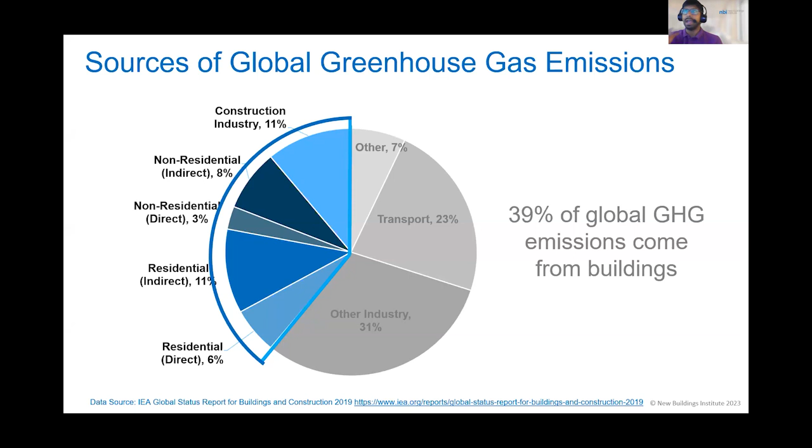All right, I think folks are pretty familiar with the slide that 40% of greenhouse gas emissions globally comes from the built environment, whether it's through electricity or combustion on site. So it provides a huge opportunity and challenge to really get our greenhouse gases reduced. Within the electric sector, we've seen a huge improvement through CFL and LED light bulbs. And now we're really trying to figure out what's next. What's the big things we can do now that LEDs are pretty much ubiquitous.

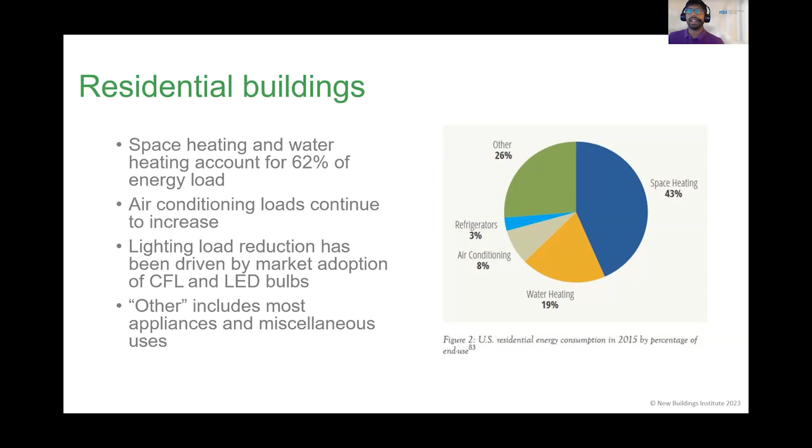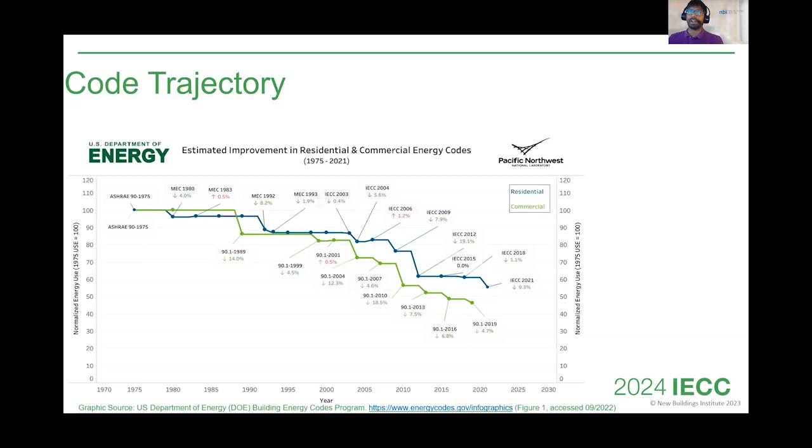For those who aren't familiar, the International Energy Conservation Code is a code released by the International Code Council every 3 years to set out provisions for both commercial and residential housing that's then adopted by states and other jurisdictions. They provided a goal to have a net zero code by 2030, and this 2024 code is the first code since that goal's been set. So we really thought it was an opportunity to crank that efficiency up.

And a lot of you might know this, some of you may not, that the process of developing the code was voting by governmental members since the IECC was created in the 70s till the 2021 code cycle. This latest code cycle was adjusted to be a consensus committee process, therefore allowing, in addition to governmental members, advocates like NBI at the table, as well as industry representatives. So that, I guess, provided some confusion. There's definitely been some learning as we go, but it's been an opportunity to kind of have a seat at the table. All right, so this process has been slow. All right, I'll pause here.

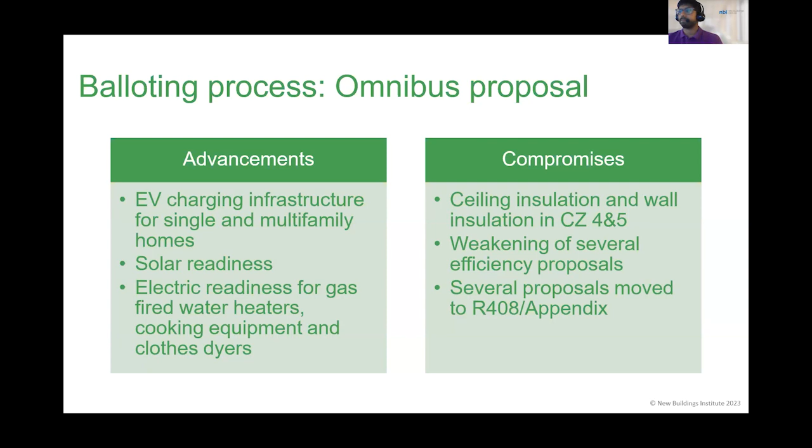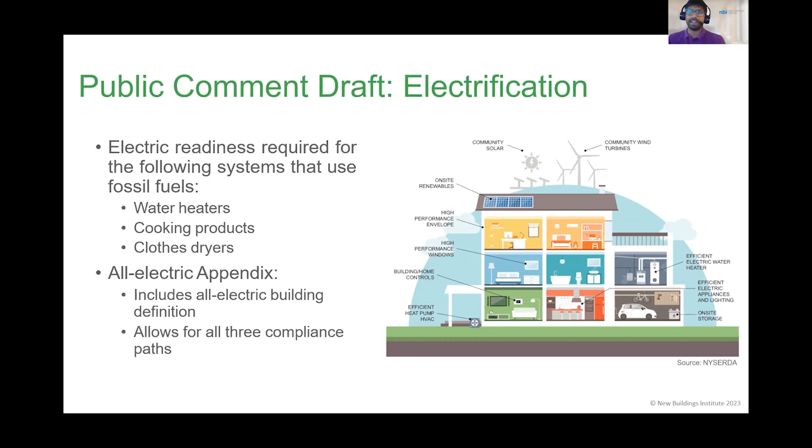All right, so through that omnibus bill, electric readiness was required for water heaters, cooking appliances, as well as clothes dryers, and there's an all-electric appendix that includes an all-electric building definition, as well as 3 different compliance methods. Again, EV charging is something that we're really excited about seeing. It's so much more cost effective to put these in on the front end rather than the back end. So primarily in R-2 occupancies, 40% of dwelling units will be required to have an EV capable, EV ready, or EVSE. And happy to dive into those definitions if folks want to.

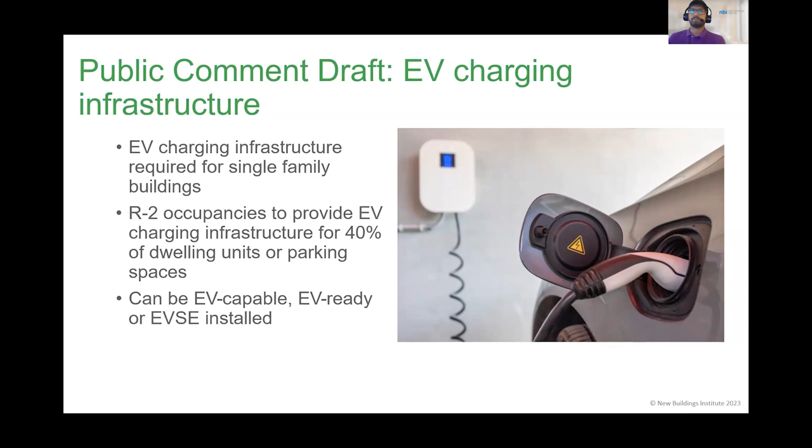Solar readiness. So this basically, with exceptions for poor orientation or smaller homes or shading, will require a very minimal amount of solar readiness, with the idea that the cost-effective way for sizing is to match the cost-effective capacity of the building. So all the technology will be there, and folks will be able to kind of hook that solar up when it's ready to go.

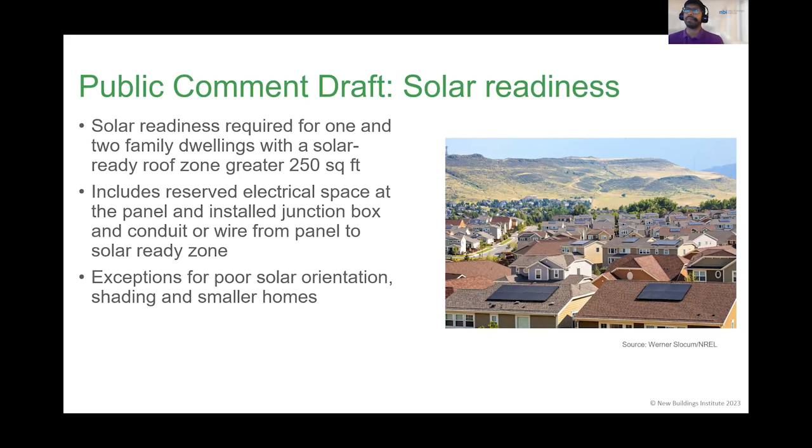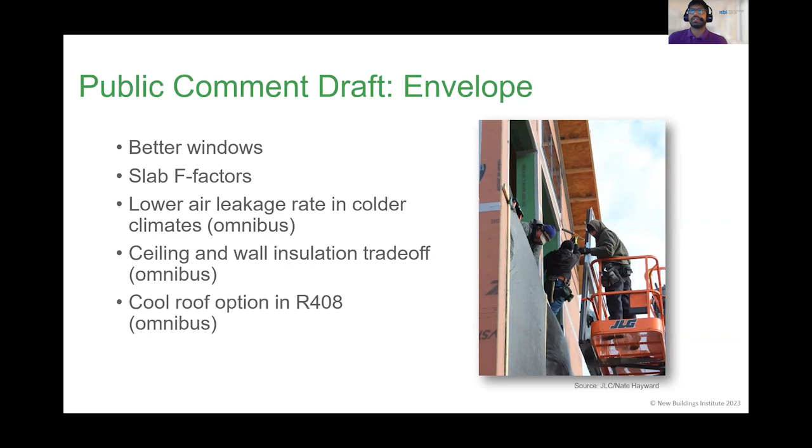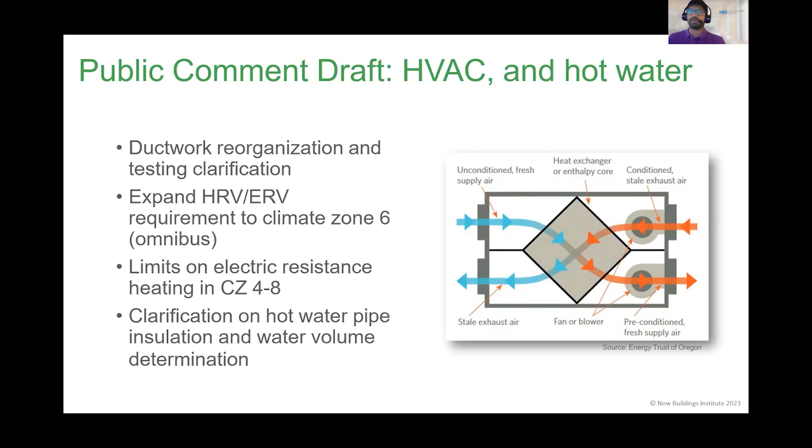Other improvements: better windows, slab insulation F-factors, lower leakage rate in cold climates, ceiling and wall insulation trade-offs, as well as a cool roof option in 408. On the HVAC side, there's expanded requirements for HRVs or ERVs to Zone 6, limiting of electric resistance heat in the colder climates, as well as increased requirement for insulation on water pipes.

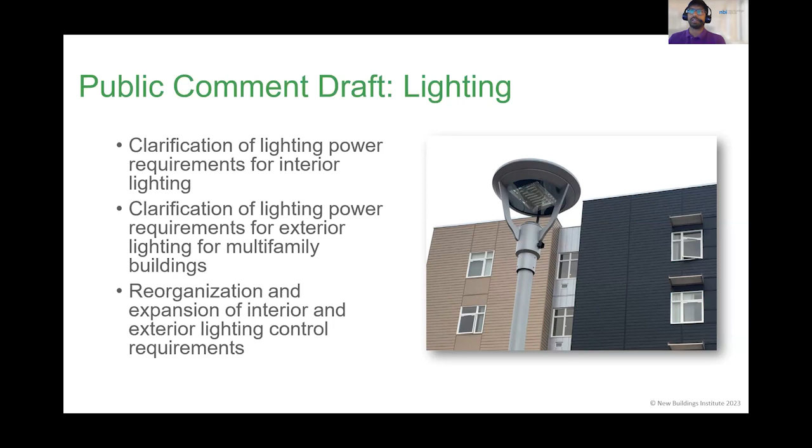Lighting, this has been a bit of a confusion between the smaller multifamily and larger multifamily. So it's making the lower 3-story buildings match the commercial lighting requirements for outside, knowing that in multifamily buildings there's a lot more outdoor parking and outdoor lighting than there is in single family and 2-family residential.

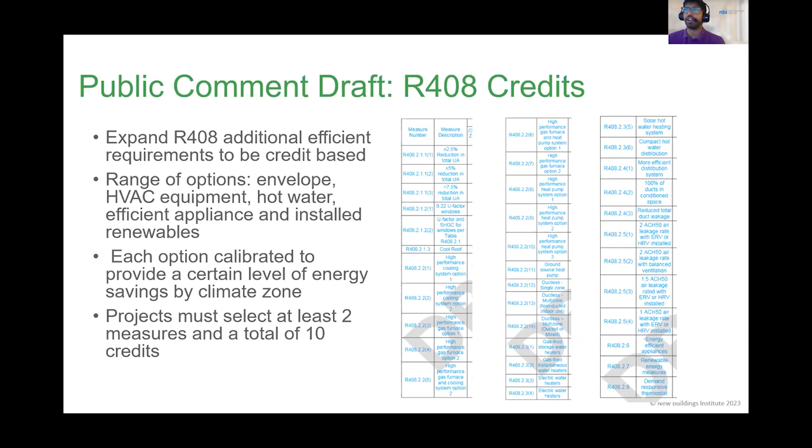What we are meeting on tomorrow is the 408 section, which requires 10 credits that amount to approximately 10% improvement in efficiency, kind of choose your own adventure when it comes to efficiency. So there's an option for renewable energy, a lot of efficiency, as well as some lighting options. So these values have yet to be determined, and they're going to get ironed out tomorrow.

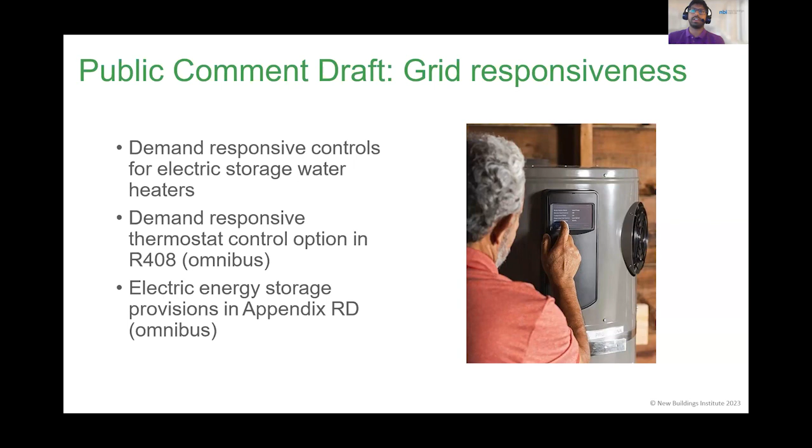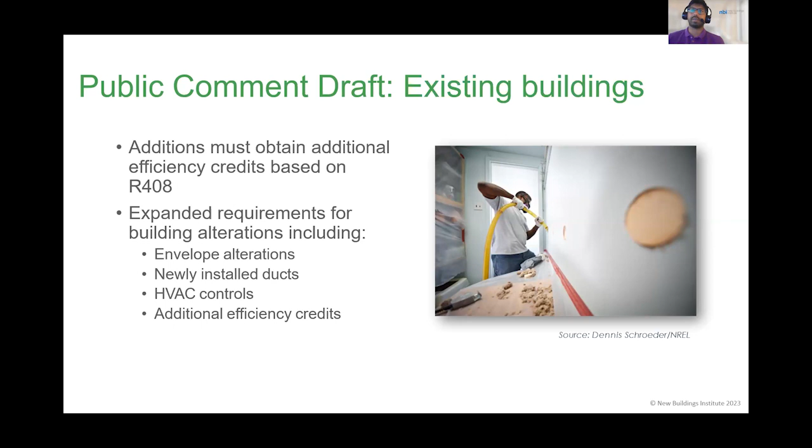All right, on the grid responsiveness side, there's demand responsive controls for electric water heaters, as well as an option for a demand control thermostat in the 408 section, and an energy storage option in an additional appendix. For additions to buildings, additions will be required to meet those additional efficiency credits, as well as the more rigorous envelope and duct requirements that exist for newly constructed buildings.

Happy to dive into this deeper, but there's a lot of cleanup and consistency within the modeling compliance pathways that make the zero energy appendix consistent with our 405 and 406 sections. Can you go back to that? Do you plan to expand on this section at all, or can I ask this question? No, I'm happy to do that now.

Okay, well, because a lot of folks here are probably used to using the energy modeling, typically the HERS index rating, which is just a branded version of the ANSI 301 energy rating index, right? It generates that. And so someone might be looking at this energy rating index. That's just essentially the non-branded version of HERS for anyone looking at this. But my question when I just quickly looked at this is, first of all, what is OPP? OPP is on-site power production.

So the requirements are extended to include what that would be with and without on-site solar. Okay, so I know the DOE Zero Energy Ready program requires you hit a certain level before you can start counting the on-site solar. Is that what we're reading here? Like in zone 4, you have to be at a 53, or you have to be at a 40 if you're using solar.

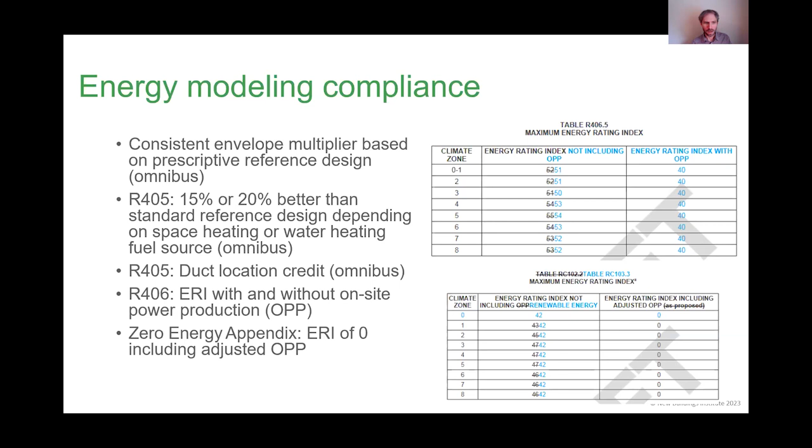Okay. Yeah, good point. Well, if anyone has any other questions on the modeling, we can come back to it in a little bit, but we'll let you continue on, Ben. So yeah, we'll segue to commercial and multifamily, and I'll really try and look at these from the multifamily lens.

All right. So not surprisingly, on the commercial side we were able to make a little more progress. Anyone who's been involved in code development knows that the residential adoption process is always more controversial. So we've made progress in heating, water heating, cooking, clothes drying, and lighting. Electric readiness requiring electrical outlet and capacity for heating and water heating.

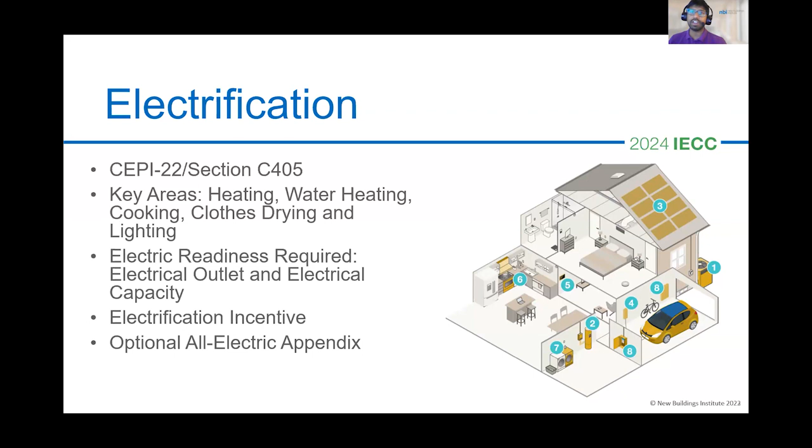I know this image is a single family house, but we did not have a good image of a commercial building. But yes, this is kind of the things we're talking about. An incentive for electrification, as well as an all electric appendix. So we see those as big wins on the commercial side.

Here are the EV requirements. I believe what's most interesting to this group is that R2 occupancy, which is multifamily apartments and condos. So we'll dive a little bit into this difference. I wanted to clarify what's EV capable, EV ready, and EV installed. EV capable means conduit and capacity. EV ready means there's an outlet there that you can plug in, and fully EVSE means you have the charging station actually in.

I guess I can pause for a second to see if anybody has any questions on electric vehicles. Yep. There was a clarification question that somebody else helped answer in the chat, which I really appreciate. So thank you for that. But just for anyone who didn't see it, what is the acronym EVSE, and could you expand on what that is?

So, yeah, EVSE is, oh my gosh, I'm drawing a blank. What we heard here in the chat was electric vehicle supply equipment. Does that sound right? Supply equipment. Thank you. I very much appreciate getting bailed out by the chat. So that means that you're plugged in and ready to go.

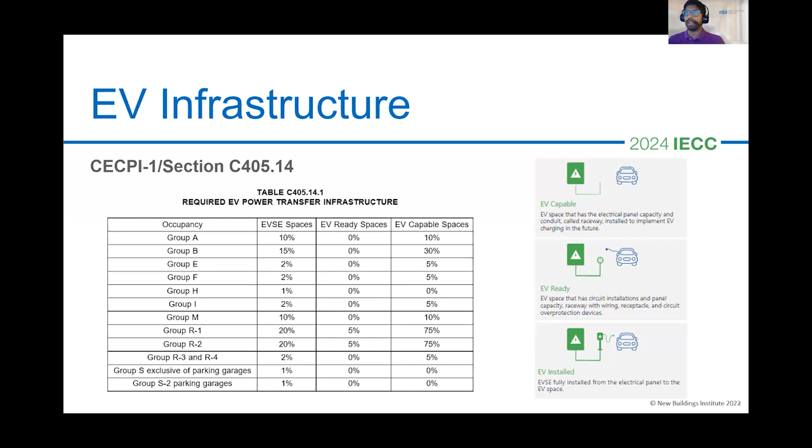One more thing that I'll mention on the EV front is that some states really want to see this language coming from the model code because they don't think that in their state statute or legislative rules the building code has the authority to mandate transportation. So this is really important for states that want to do something but didn't feel like they had the option of doing so, which Minnesota fits in that category. So I'm glad to see this coming down the road, and we'll likely have an EV requirement sooner than later.

All right, commercial. So within commercial buildings, we've required a small percentage of on-site renewables and off-site renewables when they're not able to meet the requirement cost effectively on site. So we see this very small percentage as a way to encourage or require solar, and then once they're required, realistically, folks are going to do what's most cost effective, so using the most area they can based on the energy mix and energy costs in their region.

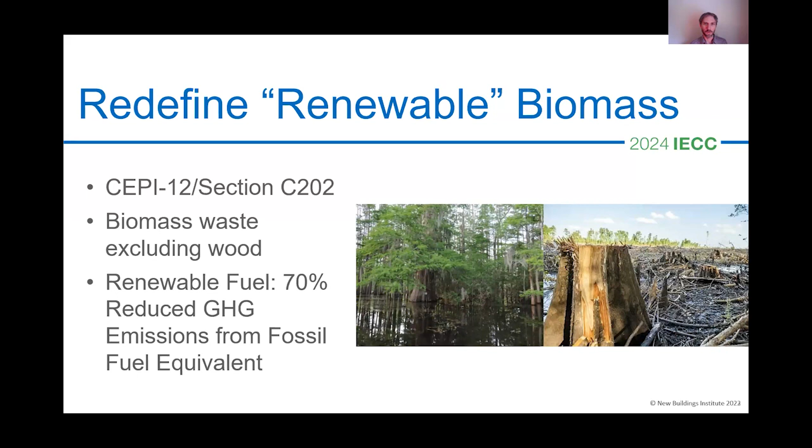Renewable biomass. So this is important because we needed to clarify that waste wood does not fit the definition of renewable energy because it has an increased carbon impact. So we are okay using biomass in specific situations, but it needs to be considered on a carbon basis as opposed to other production measures. Is that just for commercial, or is that for all building types? Just commercial, to meet that renewable requirement from the previous slide. Okay, because that requirement doesn't exist on smaller residential, so it would be a moot point. Yep. Got it. Cool.

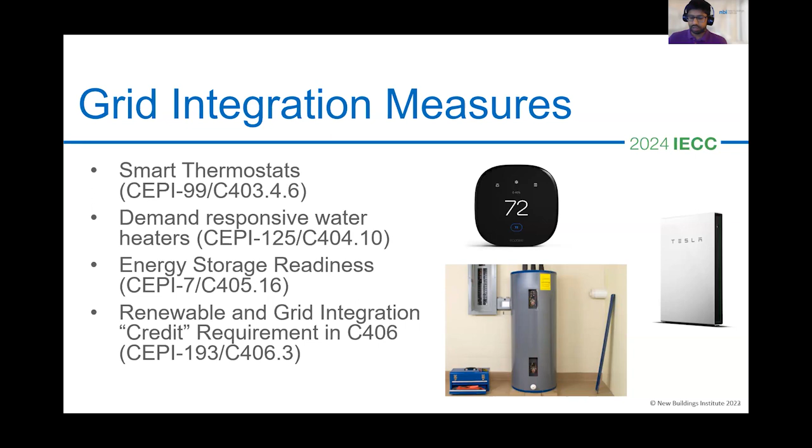Grid integration. This is again a huge area. Smart thermostats will be required, as well as demand responsive water heaters, energy storage readiness for on-site batteries, as well as a credit for renewable grid integration. So we really see this coming down, and it's part and parcel with building electrification. So huge progress there.

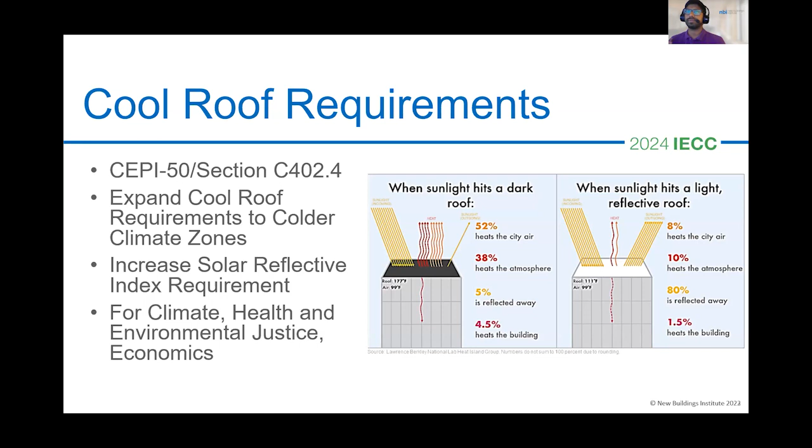Moving to energy efficiency. I'm guessing this crew has a higher familiarity with cool roofs than most builders, so I probably don't need to dive too deep in here. But cool roof expanded to more moderate to coldish climates, a requirement in 3 and 4 for cool roofs, as well as an envelope backstop. So we jumped into this a little bit earlier, but again, limiting trade-off for longer lasting energy performance. So happy to answer any questions here, but generally NBI is a fan of these efficiency backstops.

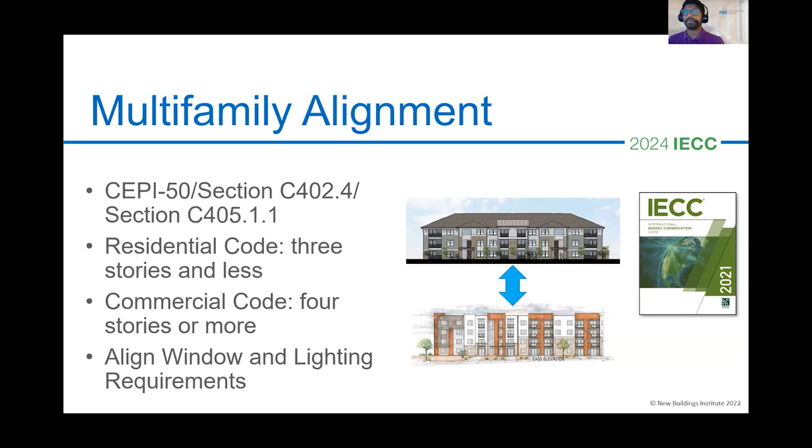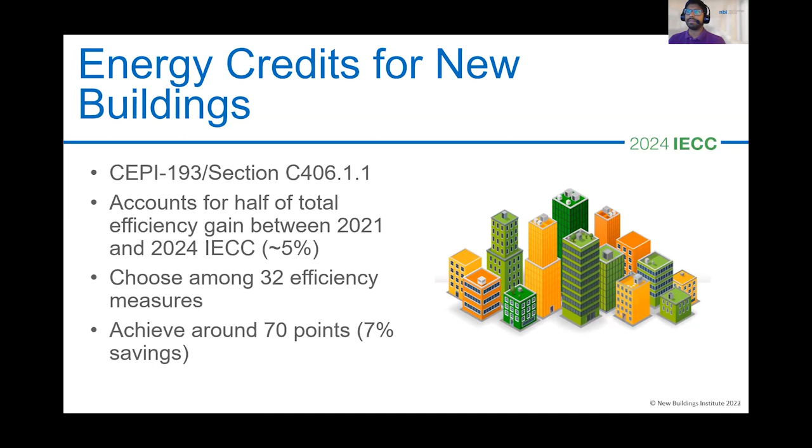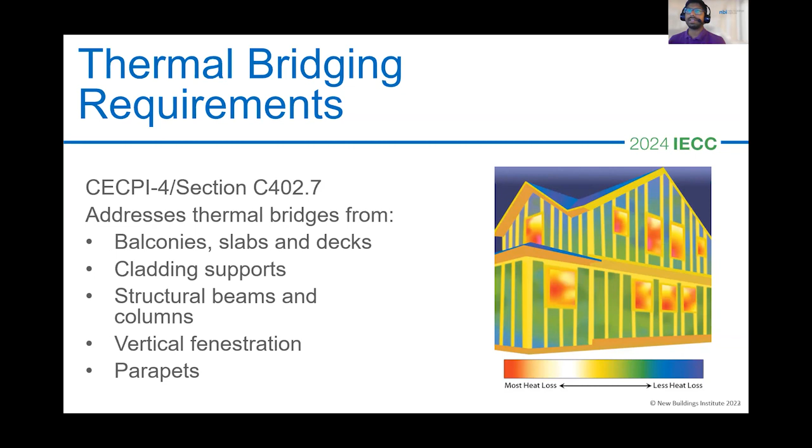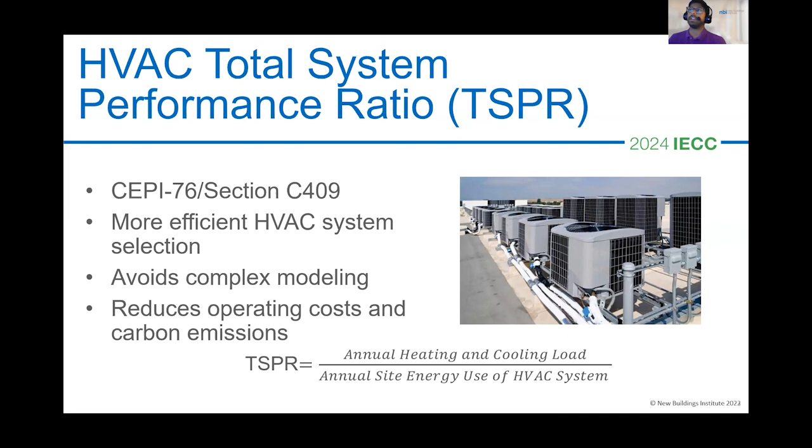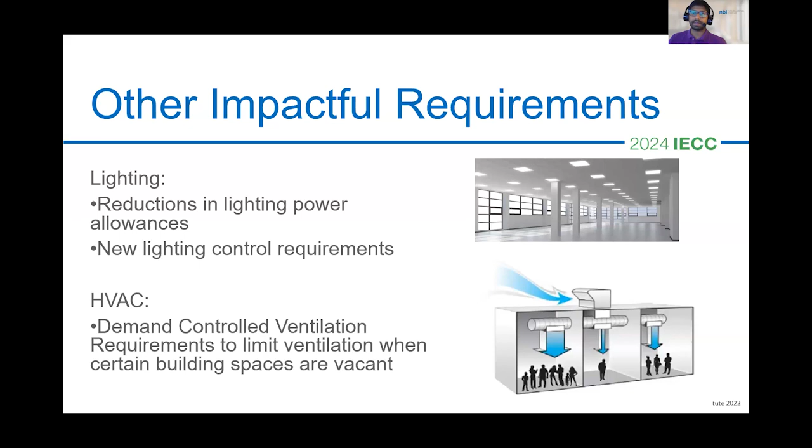This is existing building energy efficiency. We're requiring a certain number of credits for additions and alterations. It's not the full level, but it's requiring some additional points for additions and alterations, which is really important. As well as energy monitoring and EV monitoring for buildings greater than 10,000 feet. This is crucial for building performance standards that are taking off in a lot of different places. So that's really cool to see. All right, that was the end of commercial. I can pause for a second and clarify anything on the commercial side before we jump into the IRA.

Well, there was a question both for commercial and residential, and that is, where do plug loads come into play in regards to the code? In my own personal experience, monitoring my energy constantly, I just don't see them showing up on the monitoring system. And I don't have the best ones, but someone made a good point that as HVAC load and other loads, water heating, go down, plug loads will become a bigger issue. And they were pointing out things like 24/7 security systems that just gobble up energy, or pools, hot tubs, spas, and in the commercial world there's millions of things we can discuss that we don't have time for. But where do plug loads come into play in all this? Are they being monitored? Are they just kind of forgotten?